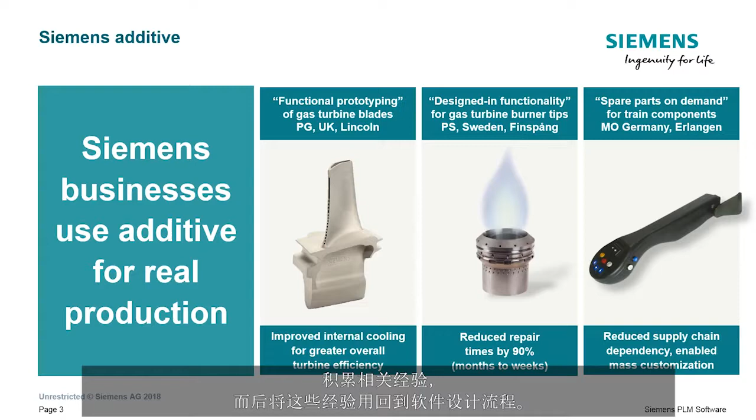Then in our mobility division, we're printing custom parts for various different solutions, similar to the train control arms shown here. In this case, we have different customers who have different requirements and different situations, and they need custom solutions. So 3D printing is one way that we handle that complexity. So as I said, Siemens, we don't just write software. We actually make these parts, and then we try to take the knowledge from building 3D printed parts and put that back into the process when we design our software.

So as we think about the opportunity with additive manufacturing, we think about that taking several forms. We believe that companies who adopt additive manufacturing have this opportunity to reimagine their products, reinvent their manufacturing, and rethink how they do business. So on the design side, what we're seeing is a need for companies to reimagine their products for this new additive manufacturing technology. And this means not just modifying an existing design so that it prints properly, but actually rethinking a part, redesigning it from the ground up to take advantage of the capabilities that additive manufacturing brings to the table. With anything less than a full redesign, you can get small gains, but you won't really get the full potential of additive manufacturing.

Then on the production side, we see companies evaluating their processes and looking for ways that additive manufacturing can help augment and streamline those manufacturing processes. So people eliminating moldings and castings and other long lead time types of manufacturing with additive manufacturing. We see them eliminating a bunch of assembly processes by taking complex assemblies and merging them into a single part or fewer parts using additive manufacturing. Things like that are helping people take their manufacturing processes and evolve them to include what additive manufacturing brings to the table.

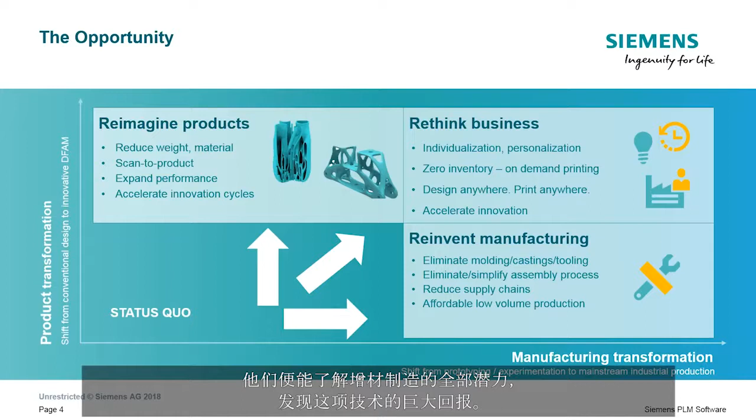Now, that being said, when we look at the additive manufacturing landscape and we talk to various different players in the industry, we also see lots of barriers to industrializing additive manufacturing. And the largest barrier is this disconnected process chain. We commonly talk to customers who have 4 or 5 and sometimes even as many as 8 different software products that they use to complete their additive manufacturing workflow. Now, each new piece of software they use requires a data translation. It introduces the chance for errors and sometimes even reduces the quality of the data that's being passed between the different stages of these workflows.

And furthermore, many industries like defense and medical require traceability of the data from the initial design all the way through to the manufacturing. So, if something happens out in the field, they can trace that problem back to wherever it started in the process. But this becomes really difficult when you have such a disjointed process here. So the result of this is that a lot of the companies we talk to feel like they're less efficient than they could be, that the process they have is more prone to error.

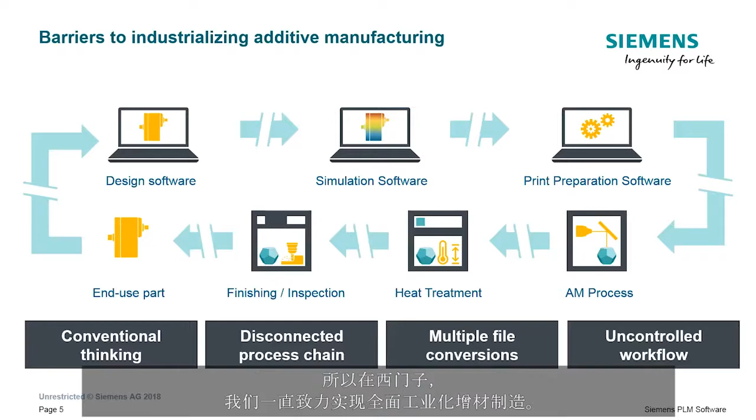So at Siemens, we're working towards fully industrialized additive manufacturing, and this means that the entire process chain must be integrated in order to allow for a smooth, lossless exchange of data between the various different processes in the workflow. So data from every step of the process must be handled and managed along with the data from the previous steps.

This sort of tightly integrated process leads to a proper, uninterrupted, what we call a digital thread from design to manufacturing, bringing about higher quality, more efficiency, and true traceability. So we believe that for additive manufacturing to be a truly industrial process, you need to have a tightly controlled industrial workflow to go along with that process.

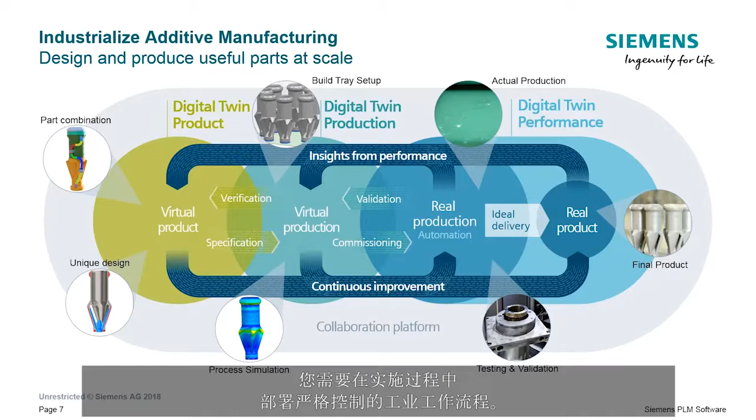Now, we've begun working towards that end by building the necessary pieces of software into our NX suite of products. On the design side, we've introduced a technology we call Convergent Modeling technology, and this allows you to manipulate CAD data with native processes, regardless of that data's origin. So facet bodies, scan data, native CAD data can all interact seamlessly using the same tools you'd use just with CAD data alone.

So in this series of images here, we have this part, and this part came from one of our partners as STL data. So it's just a facet body, right? But we need to make some changes to that. We want to remodel this little cone-shaped diffuser that's at the end there on the left, and we want to include some fins to help direct airflow. So to do that, the first thing we have to do is remove the old cone.

So in a facet modeling system, this will require you selecting a bunch of facets, possibly even individually, depending on how close they are to other things, deleting them, and then healing the geometry. So with NX, we don't need to go through those steps. We simply just create a cylinder using our normal CAD operations, and then subtract that geometry from the facet body. So it just chunks it out, and the system handles all of the intersections and the healing of the facet body automatically.

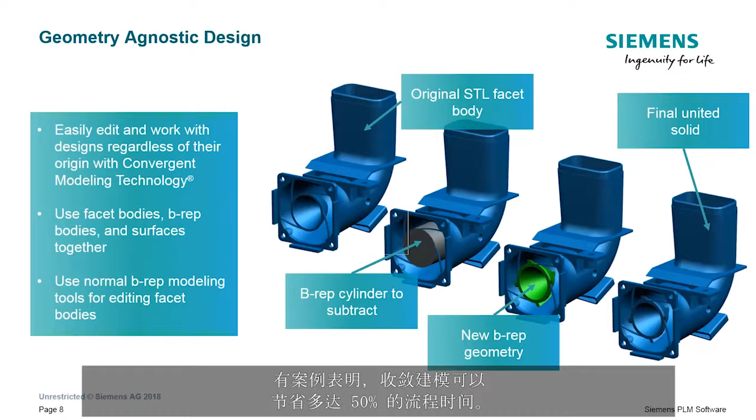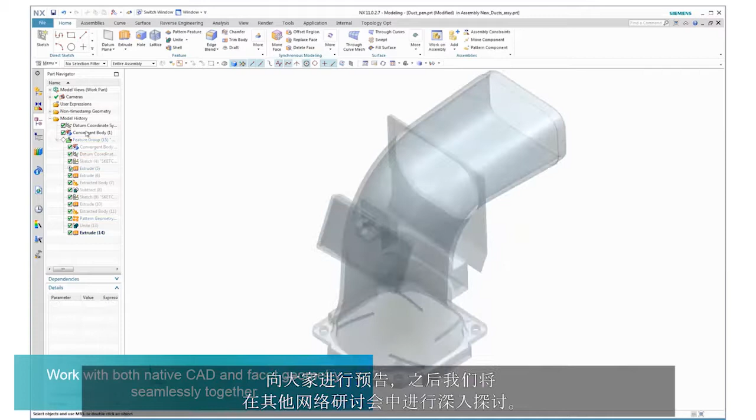So this is a video, and just to warn you guys, these videos I have today are pretty short and sweet. Like I said, the topics we're going to talk about in these videos are things that we'll deep dive into in later webinars. So for today, we're kind of touching on these things, giving you a teaser, and then we'll deep dive on these in other webinars.

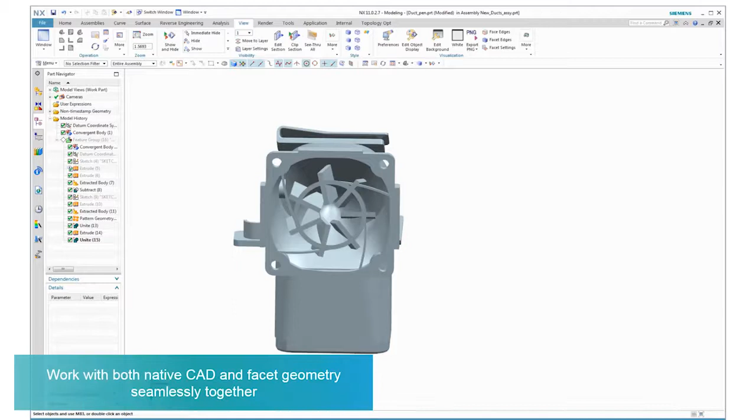But so this is sort of seeing that process in action. We've taken that duct, we're going to create a cylinder and subtract it. So there we subtracted down at the bottom the little cone. We're adding a new one in with vanes. We just hit unite, and boom, we have a final product where we had the original STL geometry and some new CAD geometry all united together in the same part. And it's as quick as that. There's really no mystery at all from a user standpoint. It just works, right? So taking this kind of geometry and using them together is something that's unique to Siemens NX, but again, very powerful for lots of these additive manufacturing applications that we see with things like facet bodies.

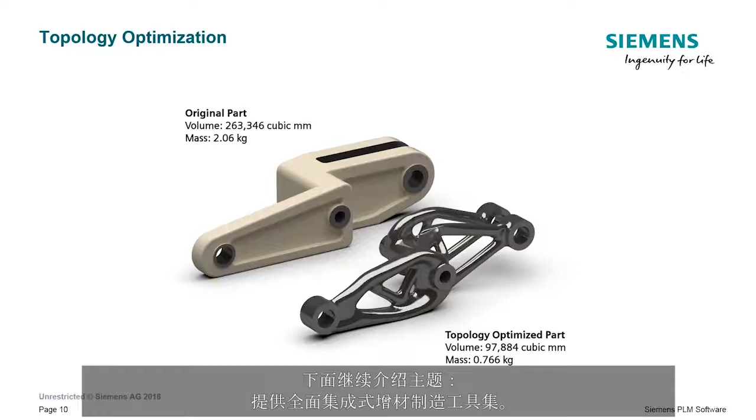So continuing the theme of providing a fully integrated tool set for additive manufacturing, we've also integrated topology optimization into our tool. So for people who wish to optimize their designs, you can do that without, again, breaking the nice digital chain of data from the beginning to the end.

So it's worth noting here that as topology optimization becomes more mainstream, the number of companies needing to manufacture parts like these is going to increase. And in many cases, the organically shaped parts that result from topology optimization and other generative design techniques are pretty much impossible to manufacture using traditional methods, or if you do, it's pretty difficult. So to manufacture parts like these, you really need additive manufacturing.

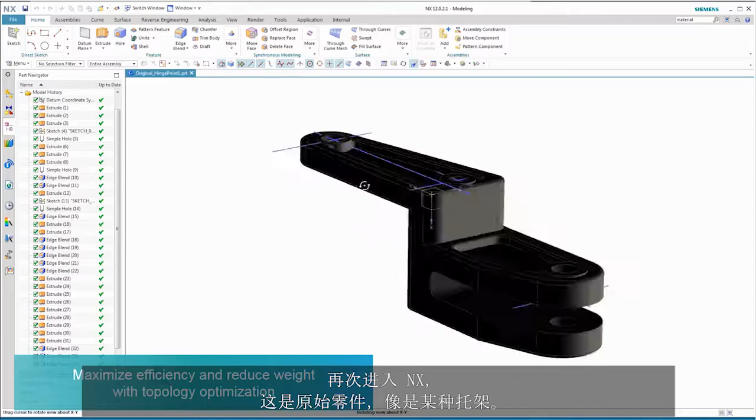So to look at what this looks like inside of NX, here we're inside NX again with the original part, sort of a bracket. And what we're going to do is we're going to create a work envelope around that bracket. The pink area you see here, it defines the extents of the final part. Red area is keep out area, and the blue areas are pins. And what we're going to do is we're going to assign a material. So I think we already have it assigned in this case, but we're going to assign a material steel. And then we're just going to tell the system to run.

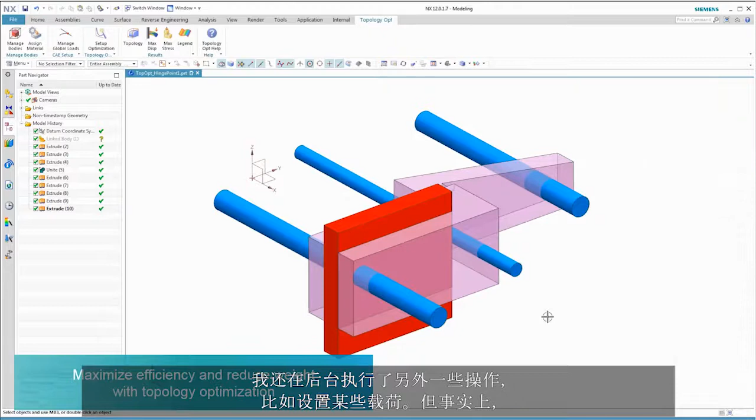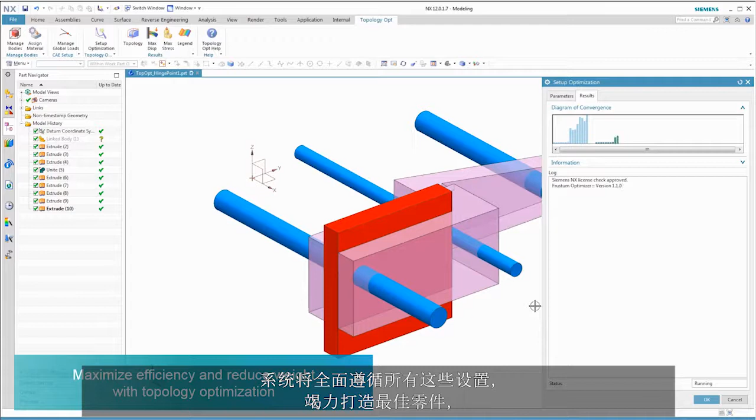Now, in the background, I've done some other things like set up a few loads, but in reality, there's not a whole lot more than what you see here. And again, we'll be deep diving into this in another webinar later here in a month or so. But you tell the system to run. It's going to go use those loads, the conditions you've given it there, the bounding areas, the keep outs, the pins, those sorts of things. It's going to have a look at all of that, and it's going to create an optimized part that's also been analyzed automatically for strength and deformation.

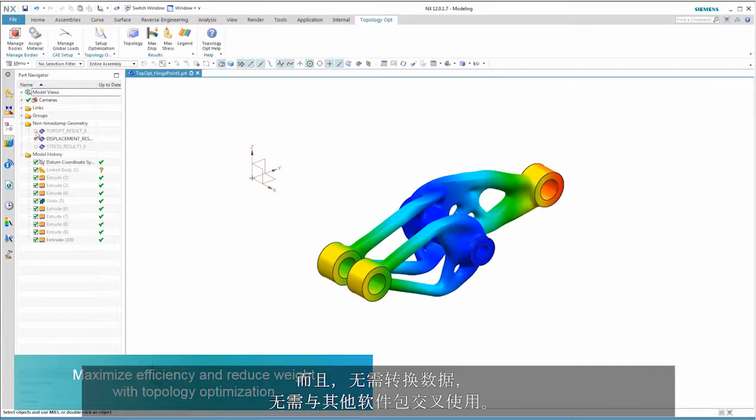So the system is going to run here, and again, this is all nicely integrated. So the part that results from this can be put directly back into your assembly inside of NX. Again, no data translations, no back and forth with other software packages. It's all built in and results in these nice, smooth parts that can be used directly inside of an NX assembly.

Now, of course, Siemens also has a strong set of traditional analysis tools to ensure that the final design will meet your specifications. We have a long history of providing robust analysis tools for things like thermal analysis, flow, vibration, acoustic simulation. Between NX Simcenter, LMS, FEMAP, Star CCM Plus, and others, we definitely have whatever simulation and analysis tools you need to ensure that your product's performance in the field is what you expect it to be.

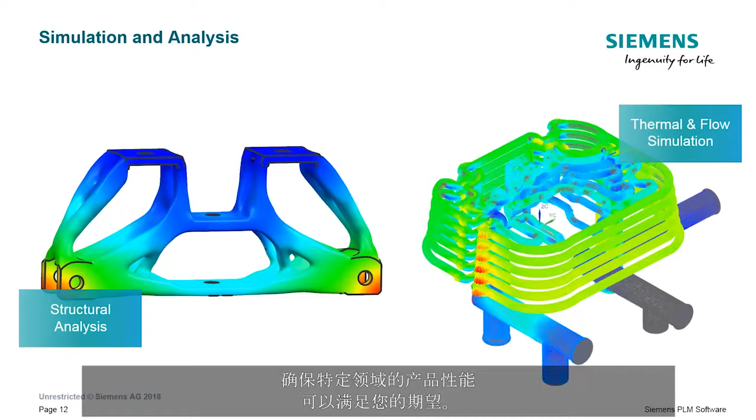So in this case, we've taken that same duct, we've done a fluid flow analysis. But like I said, there are other standard analyses available inside of NX. We've got all the standard ones you'd expect to be there.

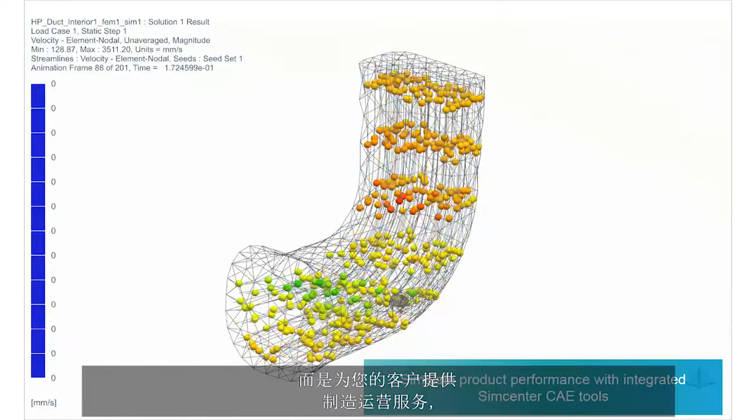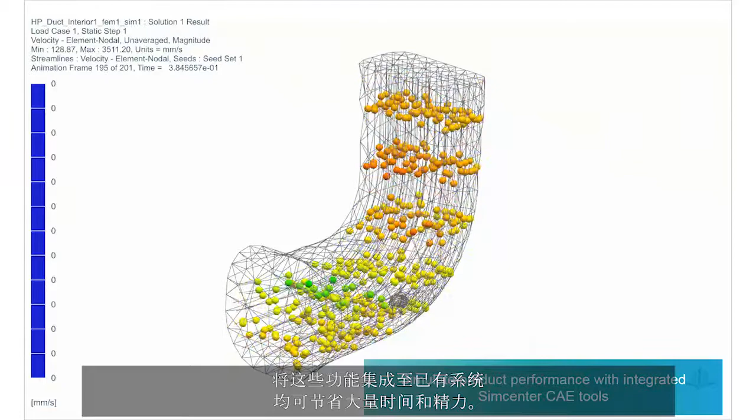Now, even if your company doesn't design parts, but instead provides the manufacturing operations for your customers, a lot of times simulation is still important because as the original customer designs are modified to fit the manufacturing process, you want to ensure that those edits that are made don't affect the performance of the part in the field. So having these capabilities integrated into the system you already use, whether you design parts or not, saves you a lot of time and effort. And again, we've got quite a few different simulation tools available inside of NX, and it's all a seamless process to analyze the data that you already have in the system.

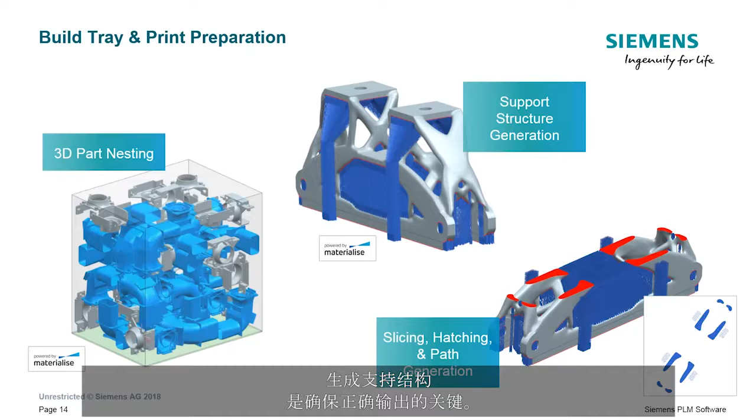Now, depending on the printing process, various steps must be taken to set up the proper build job before printing. So, for example, with HP's multi-jet fusion technology, functions like the 3D nesting you see on the left in the build tray become immensely important for executing that process efficiently. For other technologies like metal printing, the generation of support structures is necessary for proper output. And then depending on the printer type, you may also be able to set slicing, hatching, and path generation strategies inside of NX. So having all these functions built in means that you never lose that data fidelity or the traceability throughout the entire process, like we talked about before.

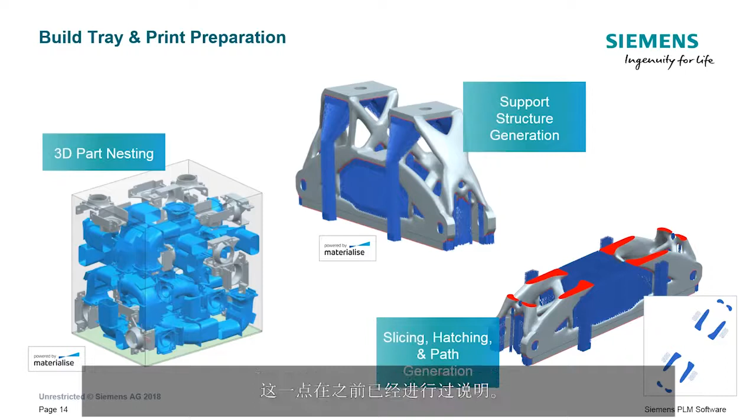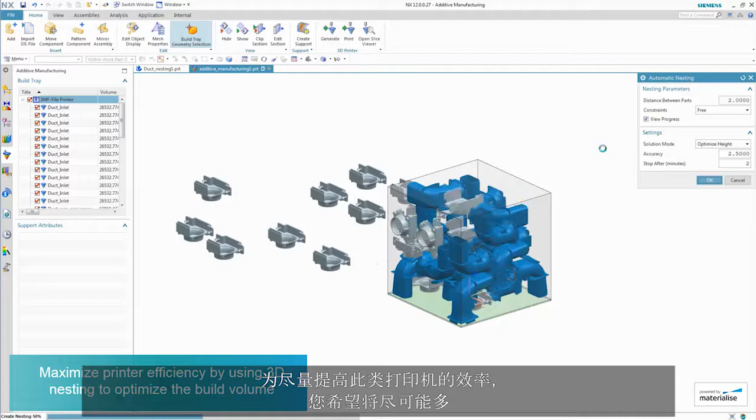So here's a video of our nesting capability. So again, in this case, we have the same duct part and another part that we're nesting here. And like I said, this is really useful for printers like, for example, the HP multi-jet fusion printers. To maximize the efficiency of that type of printer, you want to pack as many parts as possible into the build volume, and then you want to push them down towards the build tray as far as possible.

So our system does this: you give it limits on how close the parts can be. You instruct the system to optimize according to minimum height. And as you can see, the process is fairly automatic. You give the system those inputs, you tell the system to go, how long you want it to process, and the result is a tightly packed build tray ready for printing.

Now, if you're using a metal powder bed machine, you might then apply some support structures, although for the HP this isn't necessary, so we didn't do it here. But again, this is all integrated tightly into NX, so there's no need for external tools to perform these operations like you might use today.

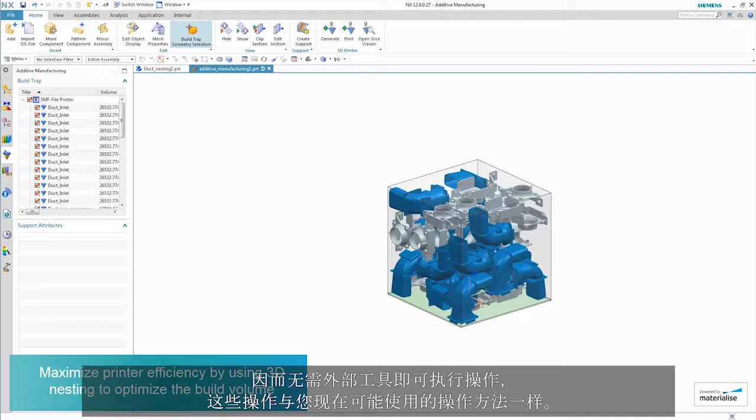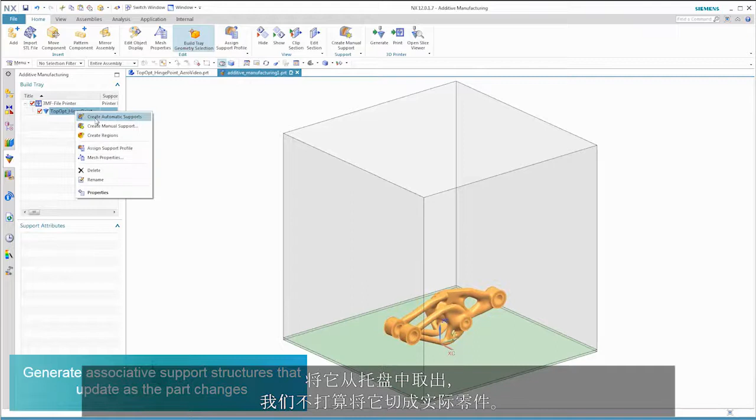And here we have a build tray. We're going to place the topology optimized part that we created before onto the tray. And since this part's slated to be printed in metal, we're not going to 3D nest it, but we're rather just going to manually place it in the tray. We move it up slightly from the build surface so that when we remove it from the tray, we're not cutting into the actual part.

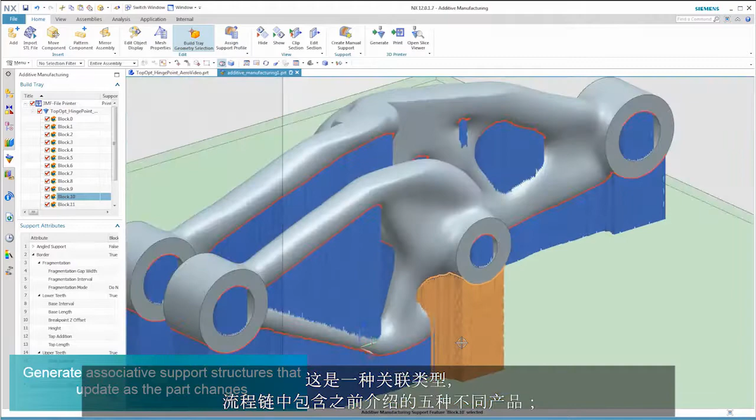And then we create some support geometry. And again, this is all being done inside of Siemens NX, so there's no need to jump to an external system. Now, the real advantage of this is that if the part geometry changes, you can automatically regenerate the support structures. And this is the type of associativity that you don't get when you have that broken process chain with the 5 different products we talked about earlier.

In this case, you just update the part, let the associativity take care of updating the downstream geometry like the support structures. Something that saves a ton of time and, again, reduces that chance for error. You don't have to rebuild things. It all just works seamlessly.

So finally, once you have your build tray set up, you need to print it, right? You need to print the final part. So again, this is an integrated process for Siemens NX. You simply select the printer you wish to use and set up your build tray like we saw before. Set some parameters, so the material you're using, the cooling profile, other things like that.

And finally, you just print, at which point we hand the process off to integrated build processors, and those create the proper data and instructions to drive the various different printers we support. Again, an integrated process that's completely handled within the Siemens NX system. You don't have to jump out to software that was provided by your printer manufacturer or anything like that.

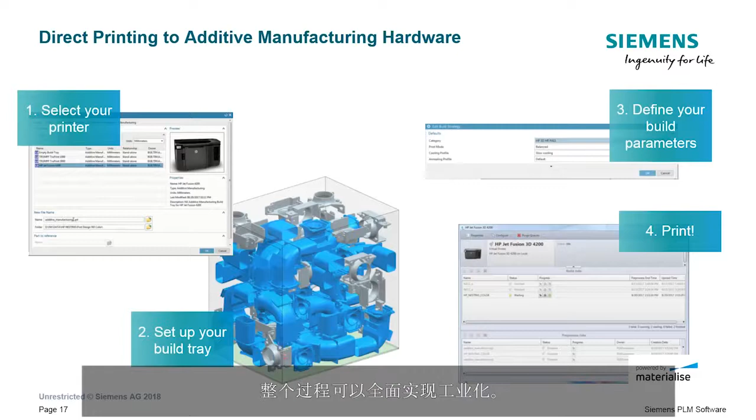But you have this complete workflow from the initial design through the analysis, through the optimization, to the build tray setup, and finally production. And all that data is tightly managed. Process can be completely industrialized.

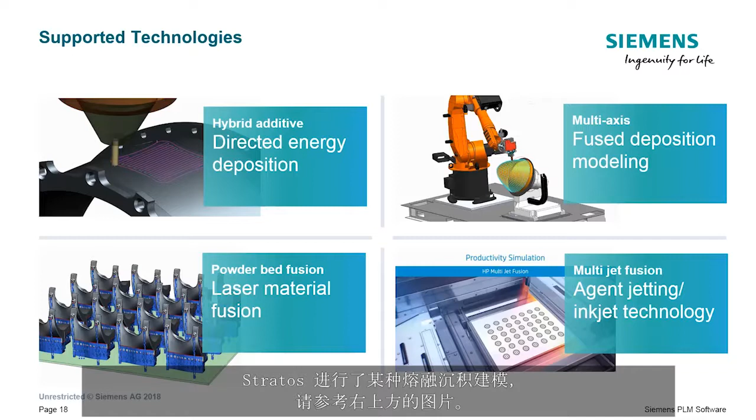So we've got the hybrid directed energy deposition up on the upper left, and some fused deposition modeling we worked on with Stratasys on the right at the top. Those are both multi-axis types of printing, which we're starting to see a lot more people taking a look at. So we're partnering with various different people to make sure we have the capabilities we need to support the widest range of 3D printing hardware possible.

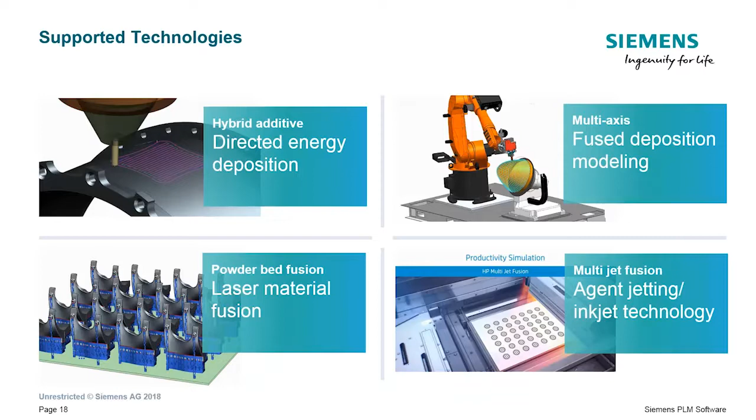Now, some companies would like you to think that once the part's been printed, this is the end of the story. You can just box it, ship it, and you're done. But in most cases, honestly, that's not true. Metal parts especially almost always require post-processing with machining or other operations to achieve the required finishes and tolerances. And honestly, parts of any kind should be validated to ensure that the final produced part meets the initial requirements.

So this is another case where having additive manufacturing functions integrated into a full CAD system pays off, because Siemens NX has all the functions necessary for post-processed machining and final part validation of your additive manufactured parts. So this means that you can program your additive and subtractive operations as well as perform your validation all within our system. And that way there's less to learn, less chance for error, better quality, faster turnaround, all the benefits you'd come to expect from such a streamlined process.

So to make all this happen, we've teamed up with what we consider to be the world's leaders in additive manufacturing equipment and technology. This is because we realize the importance of maximizing the value of our customers' investment in this AM equipment and their process. So we understand that our customers will often require multiple different additive manufacturing technologies to make their production. And so this has driven us to partner with the best technology companies in the industry. Now, these companies have years and sometimes decades of experience in the industry, and this is why we partner with them to bring our end-to-end solution to life.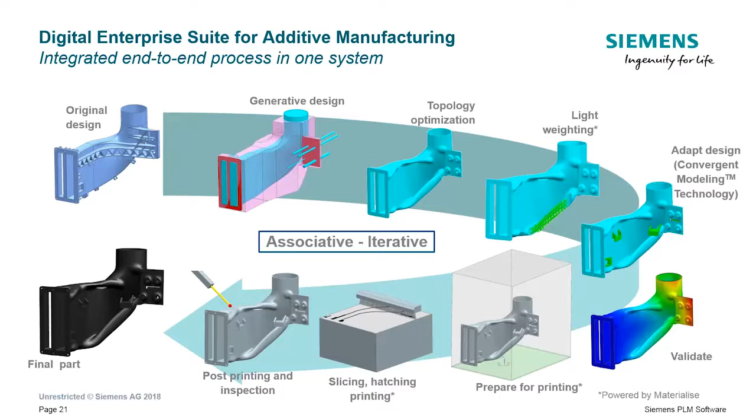Now, I mentioned before that Siemens doesn't just write software, that we actually print parts as part of our daily work. So how does all of this play out in the real world? At Siemens, our manufacturing businesses are designing for additive manufacturing, and we're 3D printing production parts that go into end products. A major component of any gas turbine are its burners.

One example of this is the SGT 800, which is what you see down there on the lower right from Siemens. This is from our power generation division, and it's their most efficient gas turbine and uses 30 of the burners you see on the left for gas combustion. The results of this redesign, taking a part from the original conventional thinking to the new additive manufacturing thinking, are pretty impressive. They make them in less time, they perform better, they weigh less, and they're easier to maintain. And all of this, of course, was done inside of Siemens NX.

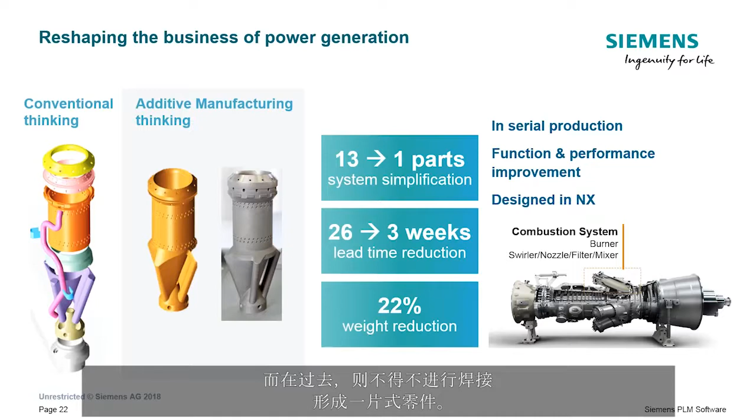And by making these design changes, like, for example, moving the pink pipe you see on the very left-hand image to the internal structure of the burner, they also improved the safety of the final part by reducing the chance for leaks or breaks in the line. This type of rethinking of the entire design is only really possible with additive manufacturing as the final production process. And again, using our NX tool, they were able to take this design from what used to be a fairly complex assembly they had to weld together into this one piece part, and have improved their design quite a bit in the process. So very impressive stuff.

Another example from our power division, this is a different type of burner. The objective here was to figure out a more elegant design for this burner because it took a lot of manufacturing effort to make this original version. And of course, you can't sacrifice performance during that redesign. In this case, this burner is used to turn dirty waste fuels into power through a very efficient burn process. And what you see here is the original design of the burner system.

On the left, you see the tip that delivers multiple reactants to the combustion chamber. In the middle, there's a network of ring-shaped channels that transfer those reactants and cooling water. And then on the right are all the flanges that connect to the supply system. This original design was made by welding together a series of concentric pipes and these machined components. And you can see that the shape and design was dictated by how this part is manufactured. So the challenge was, how do you redesign this to reduce the cost of manufacturing it while maintaining the performance?

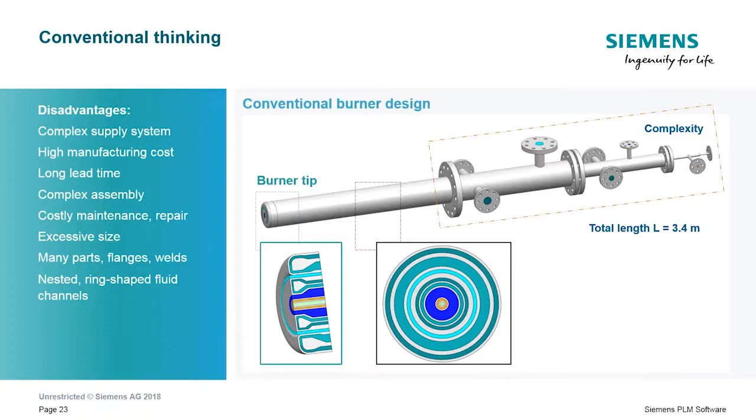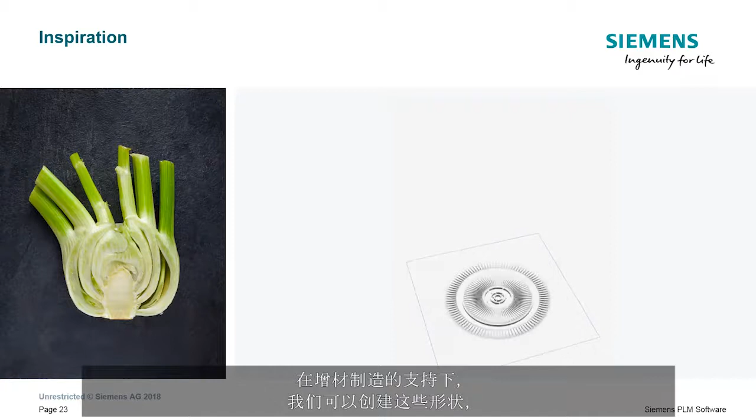So here's where the aha moment came. Somebody was probably making dinner and started thinking about this, and they saw a fennel and thought, well, what if we could take that internal area of the fennel, how it twists and rotates around itself, and use that as the inspiration to redesign. Additive manufacturing empowers us to create these sorts of shapes that never could have been made using traditional manufacturing methods. And they used NX to create a parametric model of this new concept.

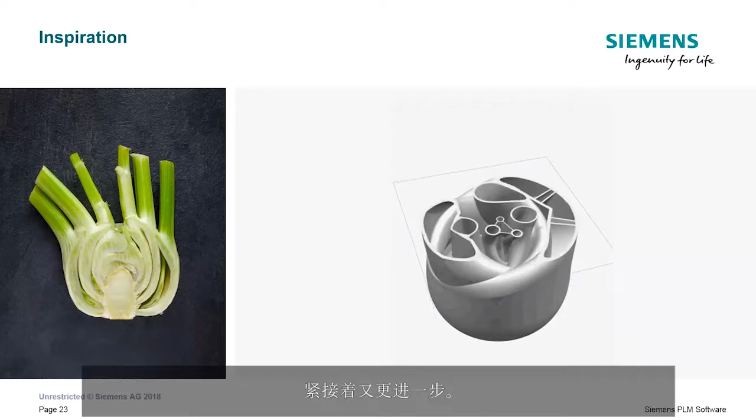And then they took it one step further. They very quickly achieved their optimal design by letting the computer do a lot of the work. They did this with the digital twin. They linked this parametric model in NX to our other products, Star-CCM+ for CFD analysis, and then HEEDS to explore the design space of possible solutions. And those two together came up with a highly efficient design for the internal channels inside of this particular burner head. Star-CCM+ and HEEDS are two other Siemens products, but they allow you to optimize designs using methods other than topology optimization, again coming to a solution that's optimal for the requirements of the various different situations.

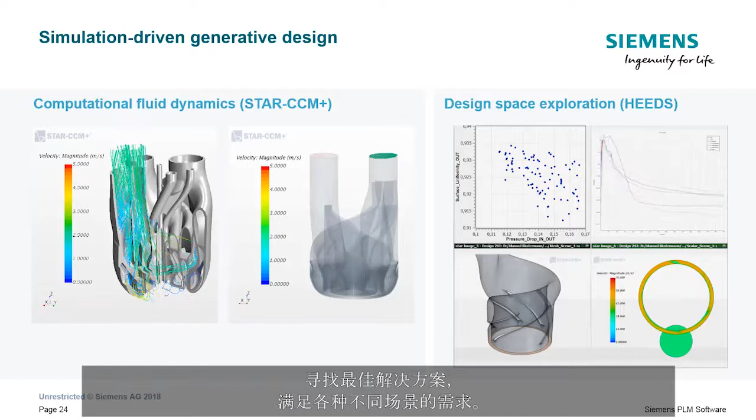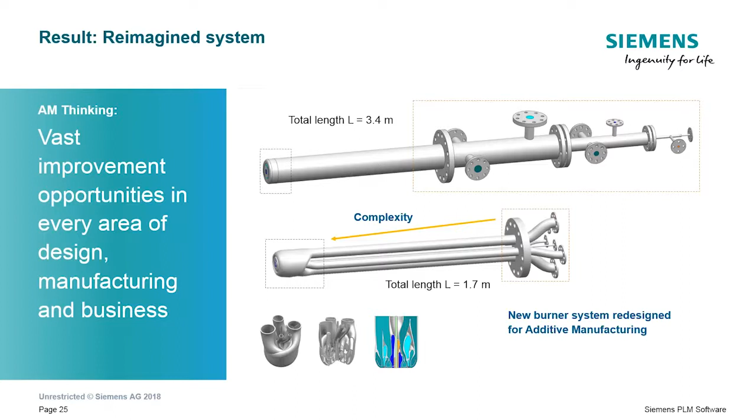And this is the final result. So you may have heard the phrase, with additive manufacturing, complexity is cheap, and this is one of those things that kind of proves that case. We have a new, more elegant design that compresses all of the complexity of that entire original system down into the small head of the burner that's now 3D printed. And this was done with a significant reduction in manufacturing effort and cost.

So over 50% reduction in the number of welds that was required to assemble the burner, less than half the number of parts that were present in the original design, half of the size of the original design. And in the process, the team also identified a number of improvement opportunities across design, manufacturing, and even business.

So as I stated, at Siemens, we don't just make software for additive manufacturing. We actually use our own software to make these awesome parts in our daily business. And we're creating these amazing 3D printed parts in an industrial fashion with our own tools.

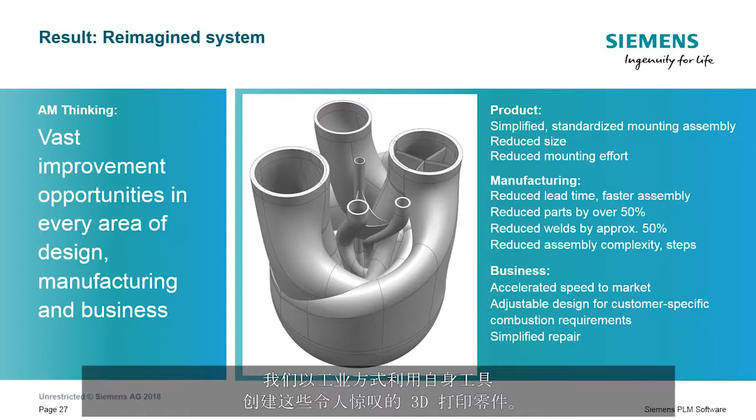So just to summarize where we're at Siemens, we're working hard to industrialize additive manufacturing. We really believe that this technology allows our customers to reimagine the products they produce, to reinvent the way those products are manufactured, and even to rethink how they do business. So we want industrial additive manufacturing production to become an everyday occurrence.

But to get there, it's going to take tightly integrated software processes to enable and drive that evolution from prototyping and one-off custom printing to true industrial scale production. And that's why we've worked hard to ensure that our Siemens NX product is uniquely positioned to enable this sort of industrial additive manufacturing future with our end-to-end integrated additive manufacturing process.

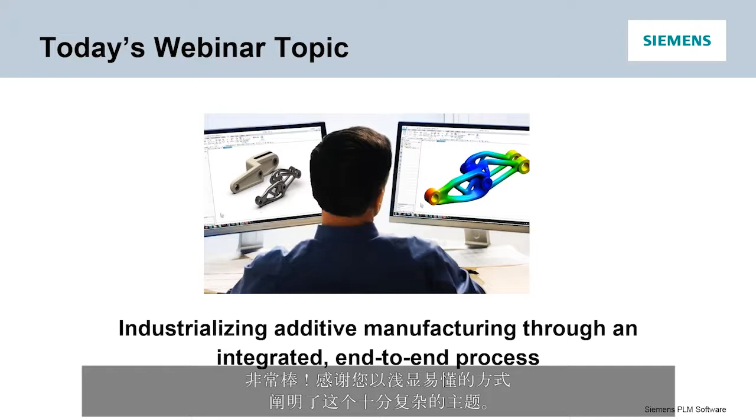Wonderful. Thank you, Ashley. Let me take back the ball. I'll put you on mute. Superb presentation. Give you a moment to take on some water and have a breather. You have been speaking for around about half an hour or so. Superb. Thank you for covering what's quite a complex topic in a succinct way.